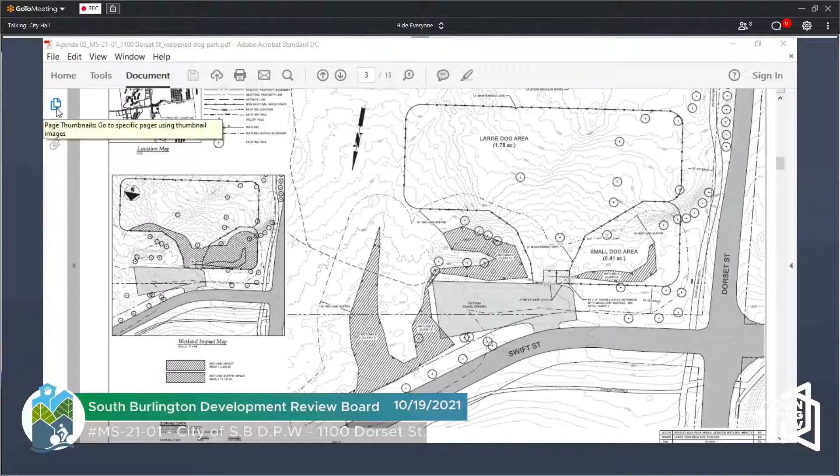Now, would you like to go through staff comments and have me respond to them, or would you like me to respond in advance? Or how do you normally conduct this? Why don't we proceed through the staff comments, since there are a lot, and you can address each issue as it comes up. Does that make sense, board?

Okay. The proposed dog park will initially smooth out the existing ground within the proposed large dog and small dog enclosure. Staff recommends the board ask the applicant to describe what it means to smooth out the ground, so if you could do that, that would be very helpful.

Our department has lots of experience with the various natural areas within the city, both maintaining them and converting them to some degree of active or passive recreation. We have not gone out and done a full topographic survey of this property, but based on recent work we did immediately south of here at the Wheeler House, Pizza Hut for lack of a better word, where we helped create a walkable, safe, accessible area.

We fully expect that particularly the lower areas of the park, there are going to be some ankle grabbers, and some spots that from an accessibility and safety standpoint we might need to bring in appropriate soil and fill in those areas. So smoothing out is not meant to be some bulldozed or large scale operation where we're stripping off, rototilling, and reseeding. Based on our experience in other areas of South Burlington, we recently constructed a playground down in the neighborhood just below Swift Street, near Cary Lane and the Pheasant Way neighborhood. That area didn't really have a formalized use, and when we went in to create it, we noticed the ground just needed some minor smoothing out. That's what we mean by that term.

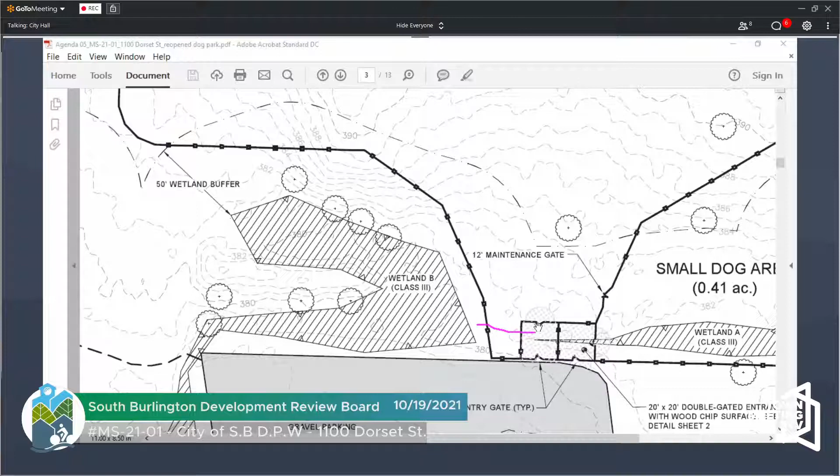Again, that's just more room in case you're entering with 2 dogs and things get caught up. So that would work as well, and I think would also address your concern, Stephanie. Good comment, thanks. Any other comments before we take public comment? Dan?

Yeah, so just to be clear, let's see if I can draw this. Can somebody turn off their purple? I'll try mine. So if we go like this, it's still going to be a rectangle, and we'll still have 2 entrances, one for large, one for small. It's just going to be wider, they'll each be wider. Is that what we're saying? Yeah. Right, sounds good to me. Good, thanks Dan. Any other comments?

I'm just curious, trying to orient here. Where is the Wheeler house? Isn't it quite close to this? Do you want me to answer that, or would staff want to point it out on the map? The staff has just drawn its rough location on the map. It's immediately south of this location, up on the sheet.

So it is pretty close, right? Yes, if you've been to Wheeler Park, there's a 6x6 wooden post with a power box on it that powers this new pizza area. That's roughly 20 feet from the southern boundary of our fence. We wanted to leave enough room between the 2 uses and not butt up right against it. And where are people going to park for this?

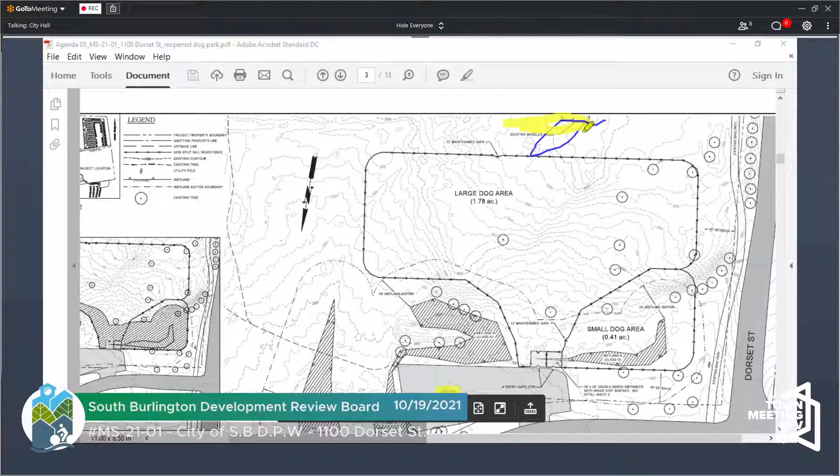For this use, the primary parking lot would be the existing parking lot off of Swift Street Extension. That's the only way to enter the park. We had contemplated putting in other entries, either from the rec path along Dorset Street or up from above on Wheeler, but the general feedback we got from the public was that's mixing too many different uses in too many different places. That's also consistent with operations at our past dog parks, including Jaycee Park and the current one at Farrell. So we figured one entrance, one location is what the community seems to favor.

Maybe I'm visualizing it wrong, but isn't the area marked off as the large dog area pretty heavily treed? No, the trees are all shown on the site plan, so it's not heavily treed. There might be some small undergrowth here and there, but for the most part, it's an open piece of land.

This is Dan again. Did the dog committee people, or whatever the committee's called, are they okay with the size of this? I still look at the area to the west of the design, over to the north-south arrow, as unutilized ground. You know how everybody, the moment you build this, somebody will moan that it's not big enough. So I'm just wondering why we can't go this way a little bit more.

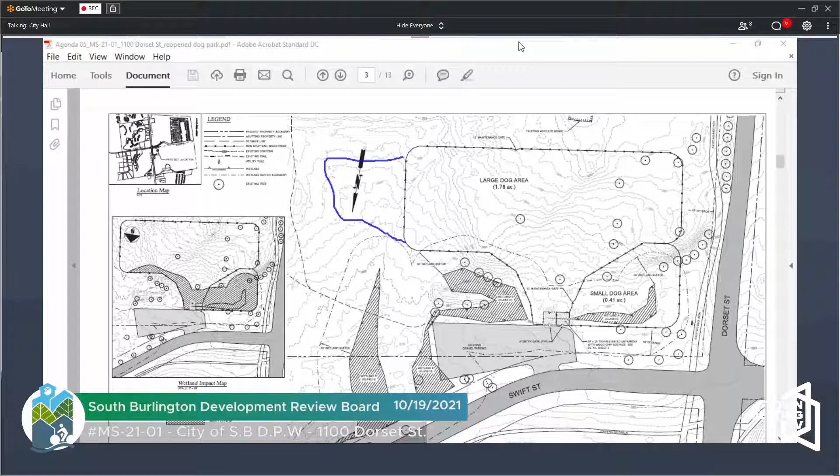The committee has twice endorsed the site plan commensurate with the application. If at such time, after a park is fortunate enough to be constructed, it needs to be larger, the city could approach the board for an amendment to its existing permit. Does that answer your question, Dan? Yes, it does. Good to know.

Thanks. Any other comments before we go to public comment? So I would suggest that first, for public comment, we go with our own city committee. You'll have to remind me what the name of it is—it's not the dog park committee, it's the...

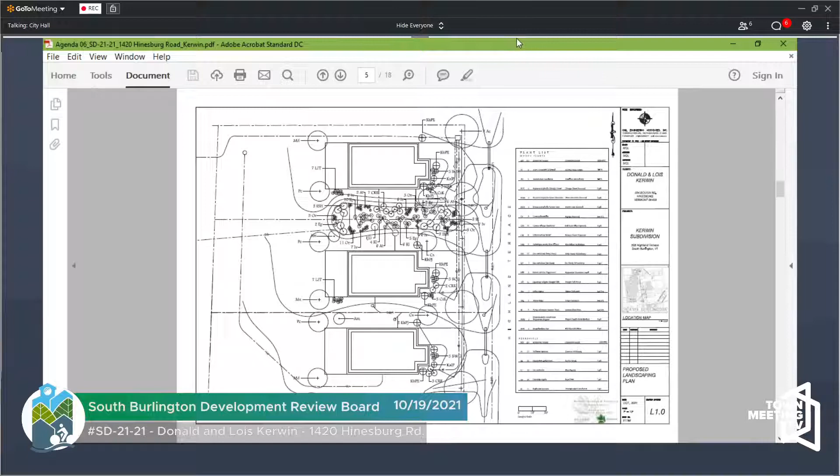We also have a landscaping plan for the proposed rain garden, which the applicant is committing to. And from a marketing standpoint, they asked to create supplemental landscaping around each one of the buildings.

Now, if we were to come in and build exactly the buildings that — let me take a step back. The family has no interest in building anything here. They're just looking at selling the lots. So there will be somebody else that comes before the staff for a zoning permit.

What we would be looking to do is to have the flexibility to have them create a building footprint and a building that complies with the land development regulations, but also within the context and requirements of hopefully an approval for this project. So the family is not going to build these particular buildings, but they are submitting these to demonstrate compliance with the requirements set forth in the land development regulations.

One of the requirements in the southeast quadrant is to demonstrate that your buildings are of such character that they fit with the intent of the southeast quadrant design standards. That is the effort that has been presented to the board and is up on the screen right now with regard to these particular buildings.

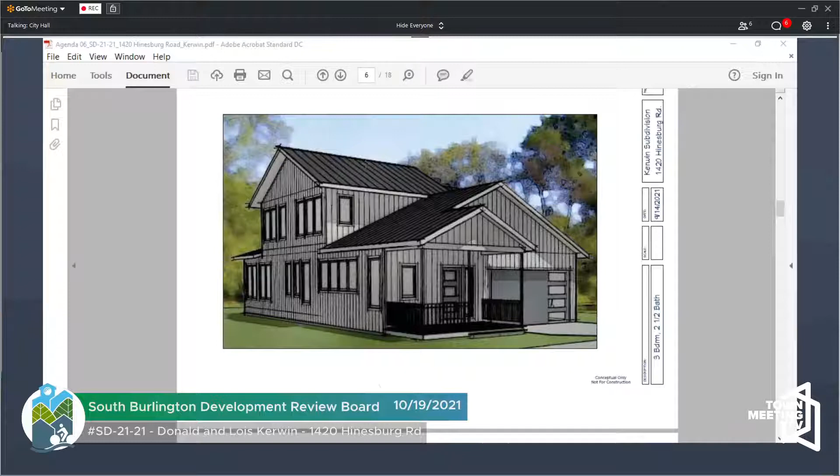If and when there is an approval here and these lots are sold, whoever buys them comes with these particular characteristics and proposals associated with the application. If they want to work within that, I would like to think they could work with staff on any minor modifications. But if there is a substantial change, then they get to come back before the board.

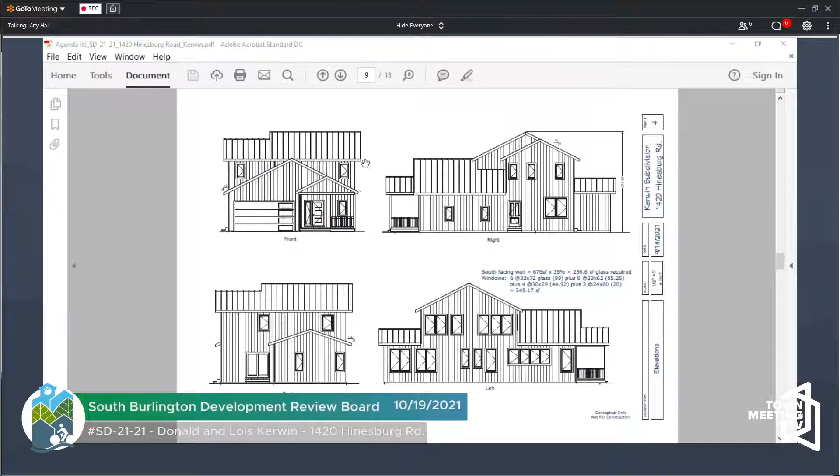Again, if there's no agreement between staff and the future owners on how to apply these concepts, then we'd normally come back before the board to have that reviewed. So we're just trying to recognize that the family is seeking to subdivide, but it's important and a requirement that these submittals be made to the board so that any future owners of these lots understand the obligations going forward.

Thank you. I should know this, Dave, but what is a rain garden?

So a rain garden is — there are a lot of different stormwater treatment practices. This is probably one of the lower technology end, where unlike a bioretention area that has a very deep profile of different types of soils and drainage, this is shallower in nature. It's designed to have short-term collection of stormwater so that it can either evaporate or, through evapotranspiration, eventually leave the site. But it's also not designed to be a major stormwater management facility.

So it's kind of a low-tech depression with appropriate plantings to support that temporary inundation of stormwater runoff that would be coming from the roofs or from some of the graded out areas surrounding it.

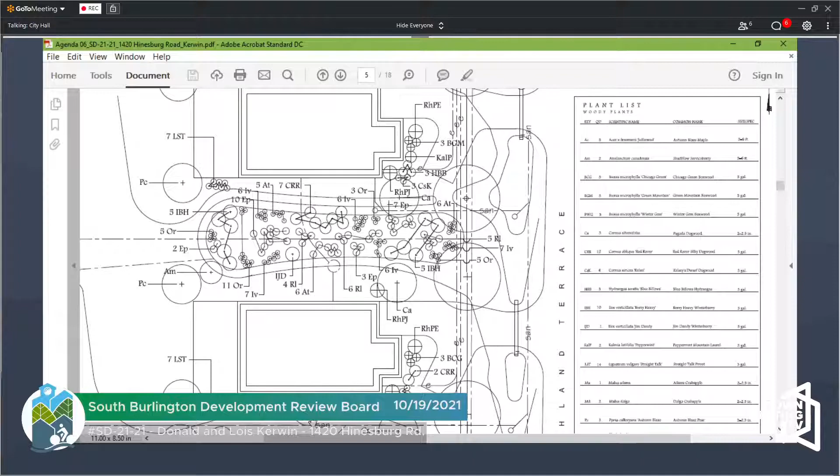Thank you. I have a question for staff. I don't quite understand, unless there's some specific requirement of the LDRs that I'm not aware of, rather than go to the trouble of a building with elevations, why don't we just have a building footprint laid out, and the buyer, who's going to be the builder, comes in with his own plan? Do they have to have a building design?

Yeah, in the SEQ, elevations are required.

It is a little bit clunky because it's only in the SEQ, but it is a requirement. Certain elements of those elevations are required to meet the design standards of the SEQ, so you can't just get a naked subdivision, so to speak.

The way we typically write these decisions is we call out what the applicant has done, and they did a really nice job. They said, here are some sample elevations, and these are the elements of these sample elevations that we are willing to commit to. It'll be such and such a style, and they specifically call out the characteristics of this drawing that they're committing to, so anybody who buys it gets the package. But it is peculiar.

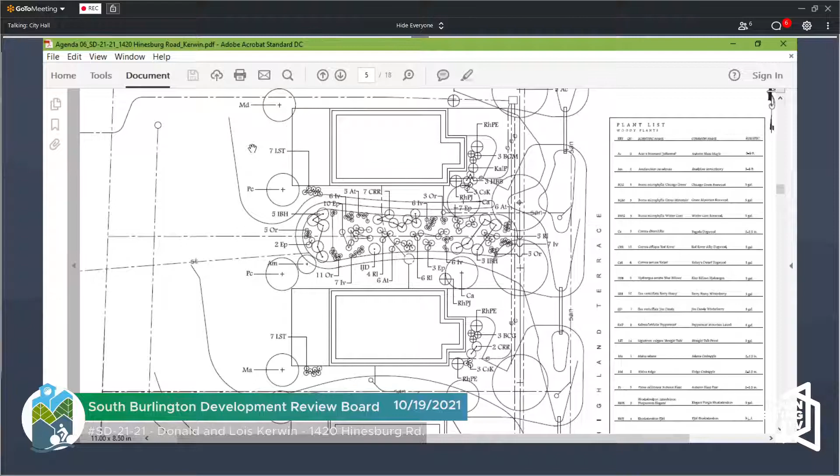To answer the first part, Marla's headed in the right direction. Typically we will have cross easements that allow this common feature to occupy portions of two lots, and there ultimately would be a maintenance obligation to ensure that this remains in place forever. There is a staff recommendation indicating it is the applicant's or permittee's responsibility to maintain the stormwater infrastructure in perpetuity.

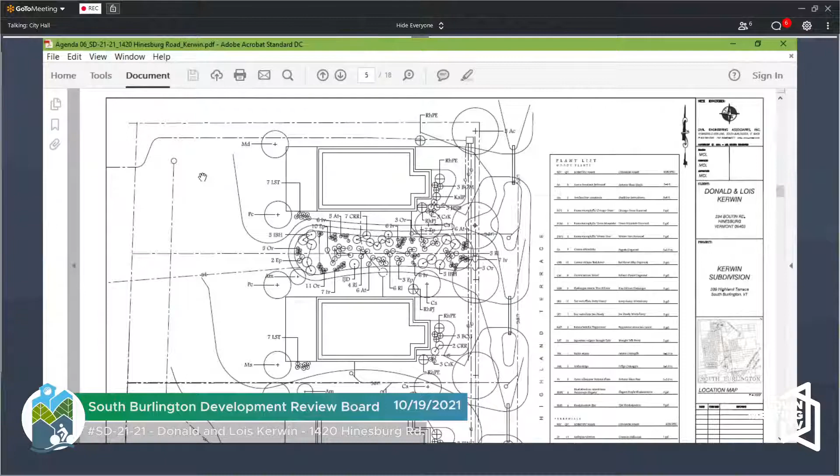The bond is not a bad idea. Did you hear what he was proposing? Yeah, we were having a side discussion about it. The thought being, does that put an unnecessary burden on the first buyer? But then we were thinking, the owner can come up with any agreement they want. So if the owner comes up with an agreement that says the first buyer pays 1/3 and they pay 2/3, and then the second and third buyers pay them back, that's their call. We don't have to get involved.

The escrow is in place for a period of typically 3 years, but that term can be adjusted if needed, depending on when the lots are sold and built. And then they get it back after everything's established.

All right, my suggestion is why don't we hold that issue in abeyance and figure out what kind of conditions apply—is this preliminary or preliminary and final? And final, yeah. We could hold it in abeyance for deliberation and try to figure out what our mechanism is rather than take up all the public time. That's fine, but at least some more fundamental questions.

What makes this a PUD? I mean, is there any common land here? All applications for subdivision in the SEQ are required to be a PUD, and that's the only reason in this case. But there's nothing to distinguish this so-called PUD from just a line of single-family houses. That's all it is. So what makes it a PUD? The fact that it's stated in the LDRs that subdivisions in the SEQ must be a PUD.

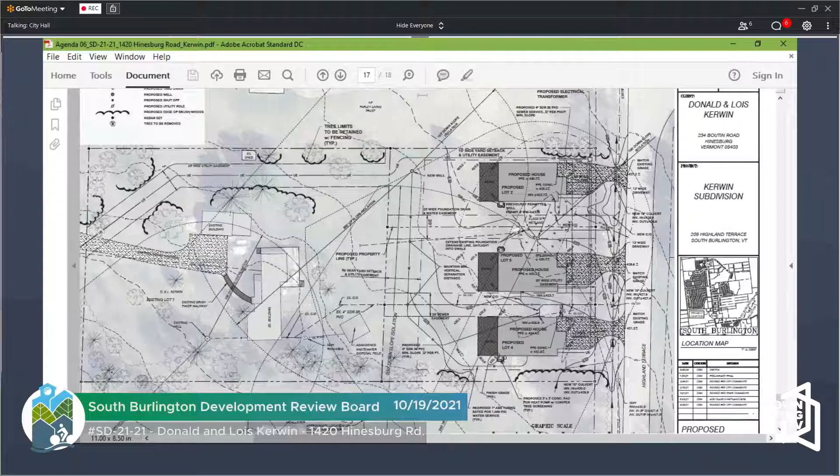So we're fully committed to following through with what Justin Rabidoux asked. There's actually a great example just two lots downhill of this particular site, where newly subdivided properties and new homes were constructed without culverts, and basically the drops of water are just allowed to go over a low point in the driveway between the street and the building. So we are comfortable with that approach. We obviously approached it in a manner that represents a traditional way of moving water through the ditch, but there really isn't a ditch along Highland Terrace.

So Public Works Department asked that we simplify this, consistent with the recent construction in the neighborhood. We're comfortable with a condition that indicates the applicant is to revise the plans to reflect the geometry inherent to the most recently constructed lots in the neighborhood. Thank you. Questions about that?

Frank, you look like you have to do some reading. I don't want to take up the board's time.

I spoke to Justin about this, and he indicated he was shocked that he wasn't being shown a plan of what this would look like. However, I feel more comfortable with it than Justin does, and I feel we could accept it as a condition. On the record, I spoke to Justin about that same thing. He said he's fine as long as we can make sure the proposed driveways are consistent with the installed characteristics just downhill of this site.

Okay, good. Now the final staff comment. Staff recommends the board review the provided elevations and floor plans and determine whether to include a condition that 35% of the south facade be glazed as proposed by the applicant, or whether to require the standard of 35% of glazing to be south-facing, consistent with the LDR. As much as staff supports natural light as a good design principle, staff considers the provided elevations result in a potentially untenable amount of glazing relative to interior home design.

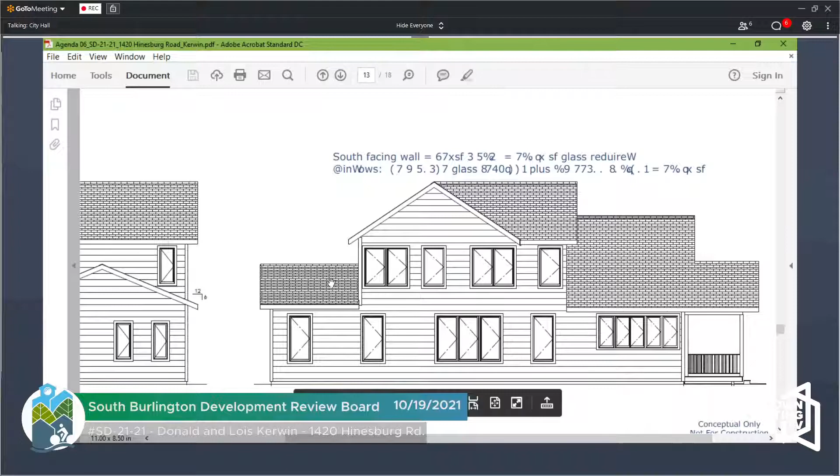This particular diagram actually takes 35% of the entire wall on the south side. I was going to say, as an architect, that's way too much glass. I've never said that about a project before, but that's just way too much glass. From an energy efficiency standpoint, the good news is you get some passive solar gain, but at the same time you also have a lot of essentially holes in the wall, because windows have insulation values that are a fraction of what a normal wall would be. So there's a balance, but we like the LDRs as far as the balance right now.

Questions and comments? I don't think that language accomplishes the result. With that language, what is the difference between what they're showing here—35% of the wall, not 35% of the glass in the entire structure?

I should point out that I've been pointing out for years, the 35% is a 'should,' not a 'shall,' so it's suggestive. So at the previous hearing, the board directed the applicant that it was going to be a 35% 'shall' in the case of this PUD. And as a PUD, we have the authority to do that.

Other comments or questions before we move on? I'm really glad we clarified that it's 35% of the whole building rather than one wall. You learn something every day. I have a spreadsheet for it. Good, because that doesn't work. Good meeting.

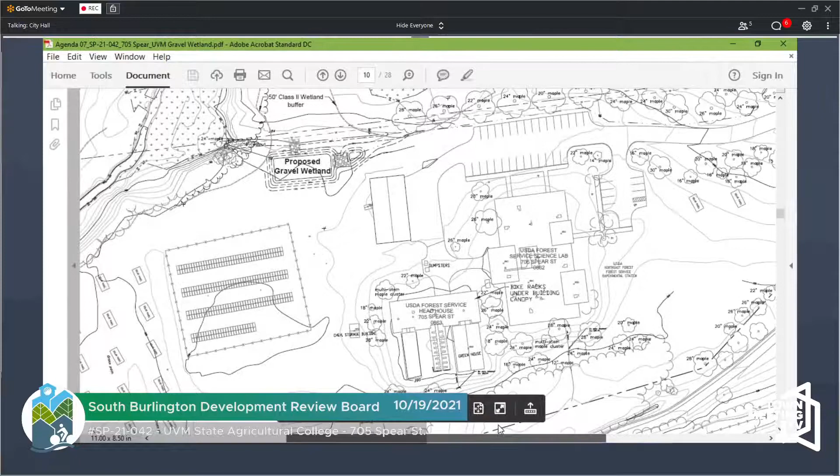So there are snow storage areas that people generally use, and we can submit that plan. One of them is near the dumpster, so we have to change that a little bit, obviously. I don't have a plan for you today, but generally you push the snow to the sides. We're happy to submit that with the improvements.

Do you have a comment about that? You want me to describe where it's currently placed? As you drive down the driveway, there's the small parking lot you turn left into. The end of that parking lot is one of the areas. So, just at the end of that, there's one of the snow storage spots. It has great sheet flow before it flows off site.

If you go back up to the driveway and head left, both sides of the road after the parking lot are current snow storage, and on the inside as well. And then the last area, if you go by the barn and go right there, that's the last snow storage area they currently use. So we would plan to show those areas on a site plan.

Okay. Does that work? Okay, good.

Number 4, the gravel wetland is proposed to be lined with an impervious liner. Staff recommends the board ask the applicant why the gravel wetland is not allowed to infiltrate. There you go. So, not the rain garden.

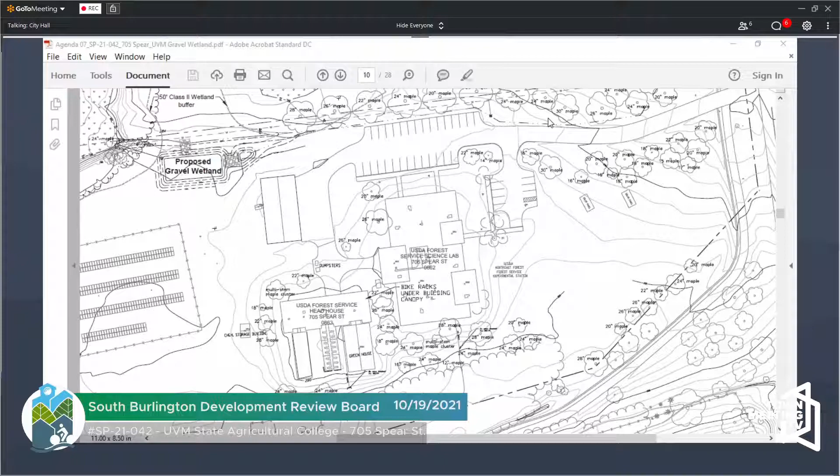So would that be acceptable to the board? If your facility could have up to 160 students and still meet the requirements, are you saying you don't have facilities for 160 students? Not at one time. Okay, sounds like that's adequate.

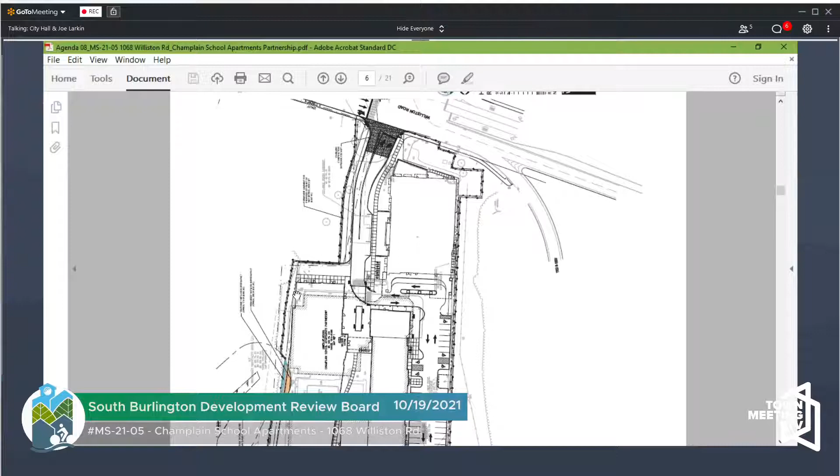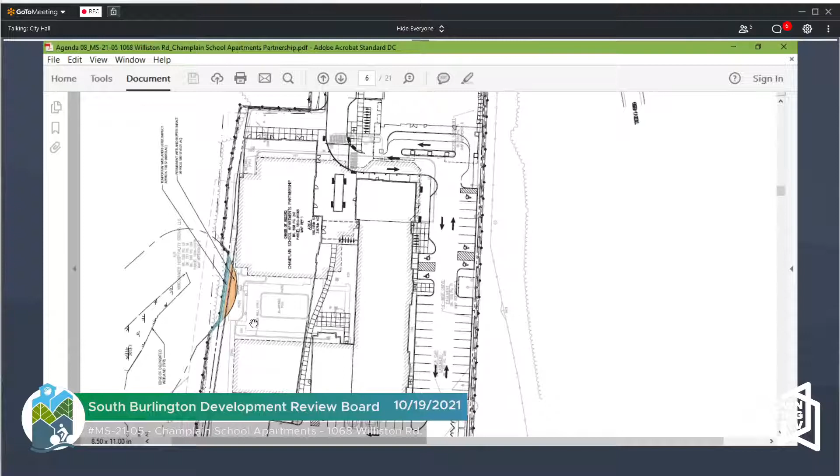Yeah, so this is a project located at the intersection of Dorset Street and Williston Road, right at the exit 14 interchange, for the existing Holiday Inn project, or hotel. This application is for the wetland impacts, the change of use. So under existing conditions, this wetland buffer is a lawn area and an impervious patio. As part of the proposed project, the existing Holiday Inn Conference Center and lobby will be, or has been, torn down, and we're proposing to put in a new multifamily and commercial mixed-use building.

So it will no longer be a conference center? So the conference center, correct, is going to be demolished. Okay, and then they're going to do renovations to the existing hotel and build this new mixed-use building. Okay.

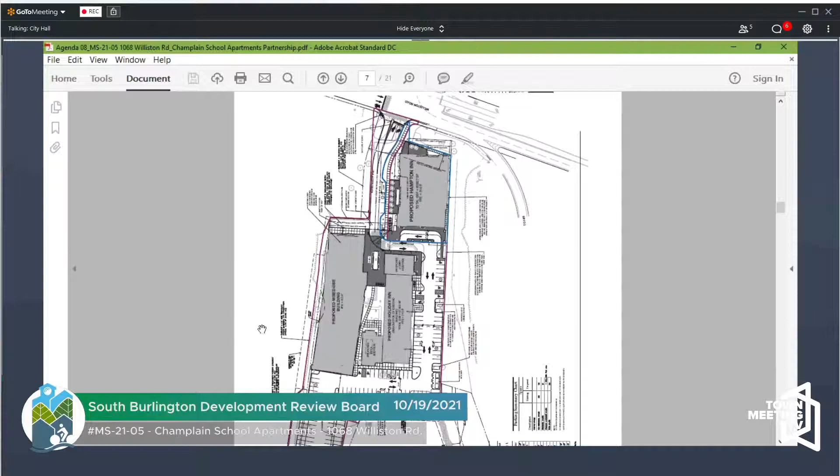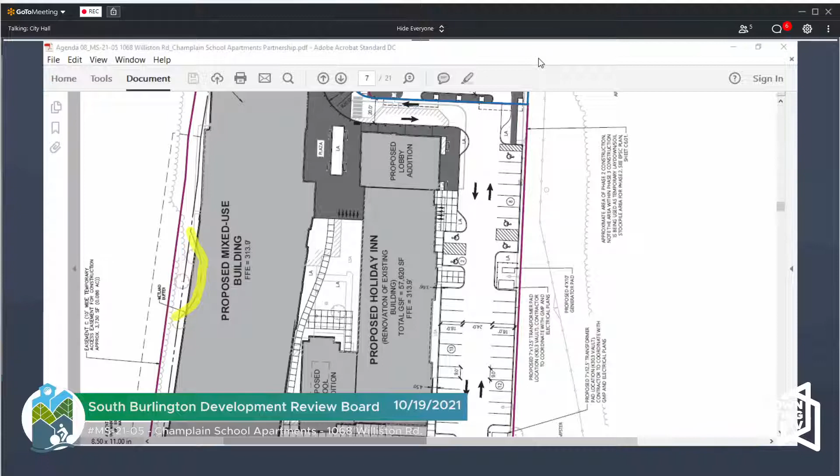I would note that the board previously approved an impact of the exact same area, actually like 50 square feet more, and so this is to amend the purpose of the impact. Previously, the impact was going to be creation of an open space area, and now they're proposing to build a building there, which I think was part of the long-term plan anyway, it just wasn't right at that time. That previous approval is still valid, it hasn't expired, and we have already received our state wetland permit for this impact. So because this is a draft decision, draft findings of facts and decision, I don't see any staff comments highlighted for the board to discuss.

So let me just open it up and ask if people have any comments or questions for the applicant. Well, that's a Class 2 wetland? Yes. And what's left for buffer? Essentially, the entire buffer is still left.

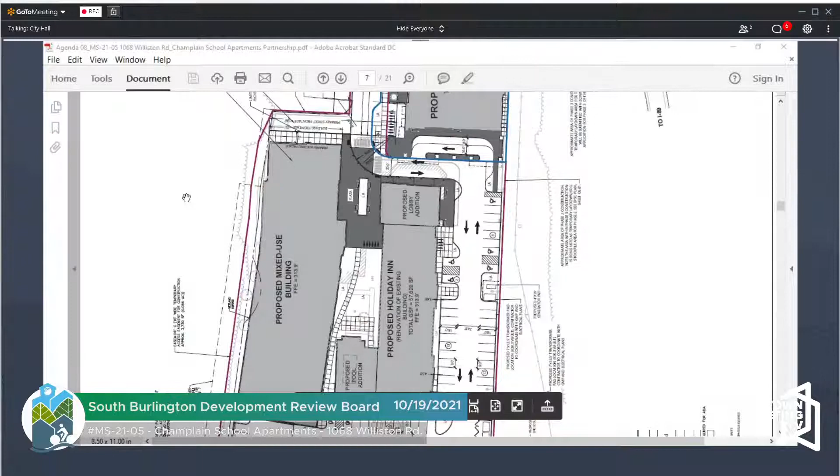What you're seeing on this plan, and I think, do you have the wetland impact plan? It should show the entire wetland. Let's look at this page, there's probably one towards the end. Let me see if I can find it. I do have 21 pages here. Yep, just a moment. I believe it is page 8, or 9.